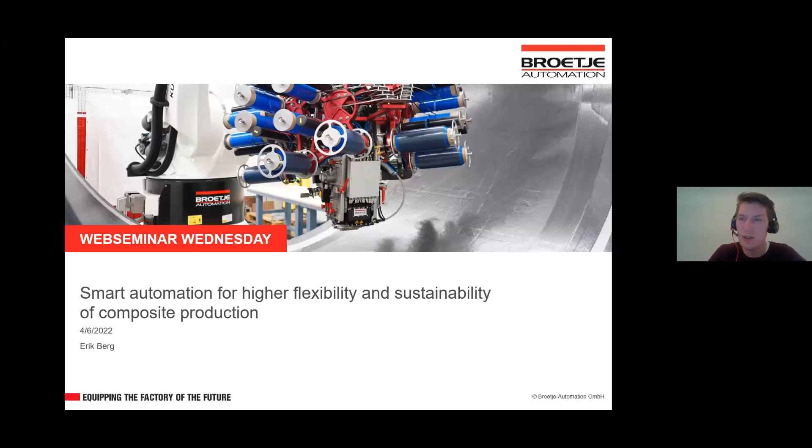Thank you for the introduction, Mr. Brenken. My name is Erik Berg. I'm working at Broetje Automation since 2015, and I would like to introduce you to this webinar about smart automation for higher flexibility and sustainability of composite production.

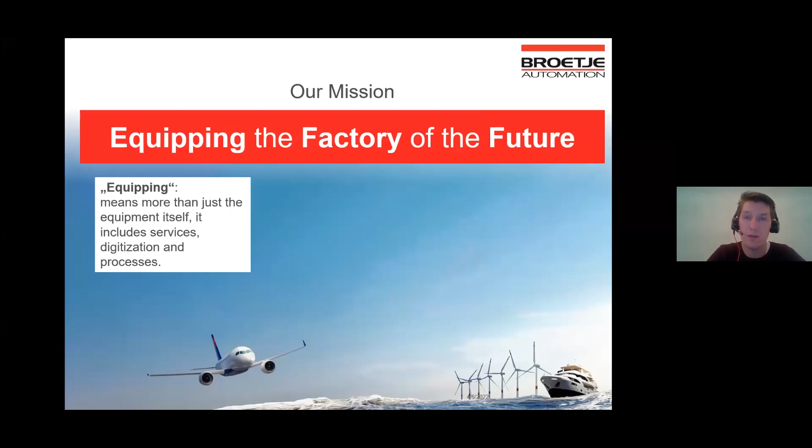First, I would like to briefly introduce Broetje Automation. Our mission is equipping the factory of the future. We are a company that is not only about equipment itself, but also about introducing services, requirements, planning, digitization and process development, which is required for factories being set up and changed. The factory itself is our core competence, where we equip with our automated machinery and all the equipment we deliver. 'Of the future' stands for the up-to-date technology we deliver, but also our know-how that goes into the newest products and processes we are constantly developing.

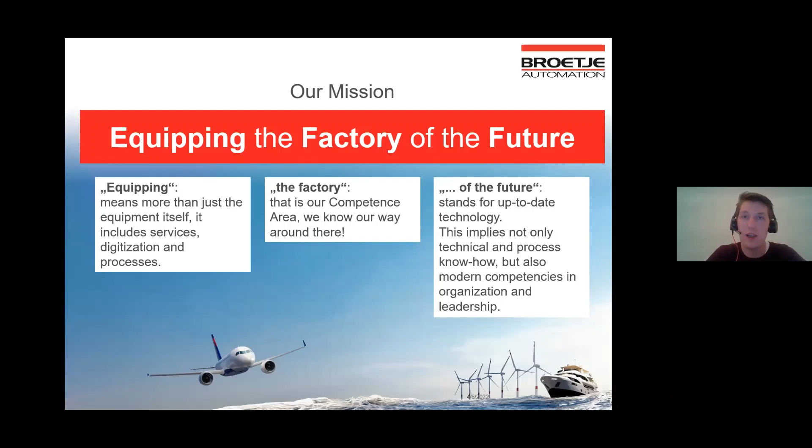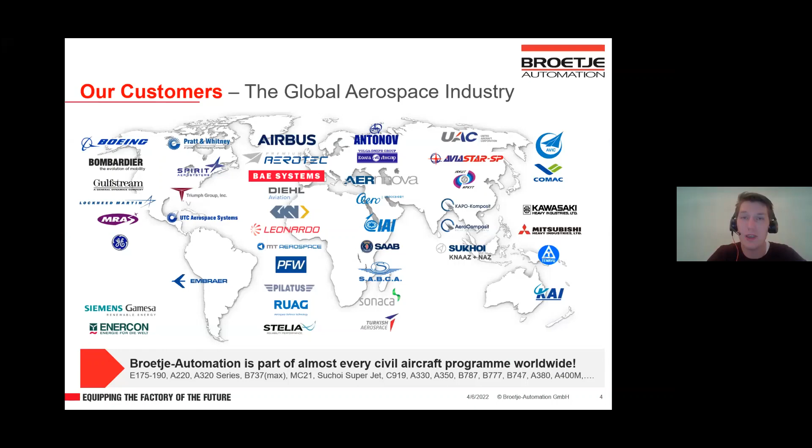Our customers are in the global aerospace industry. The big names, I guess, are Boeing and Airbus, besides all the medium and smaller aircraft manufacturers. Broetje Automation is basically part of most civil aircraft, so if you have been flying recently, probably you have been flying in a machine that was, in one part, assembled or produced on Broetje machinery.

We already have 40 years of experience, beginning in 1979 with our external activities in tool making. After relocating to Wiefelstede, we founded several subsidiaries over the years, like BA USA. We acquired companies like Hydro Control in Jaderberg, founded special service units, developed market-unique machinery, and relocated the US workshop to Chicago, where I currently am. I think the most relevant event was acquiring MAG Composites Germany, merged into BA Composites, Broetje Automation Composites, in 2013, and recently included into the main company Broetje Automation itself, which is now head of all composite development in Broetje.

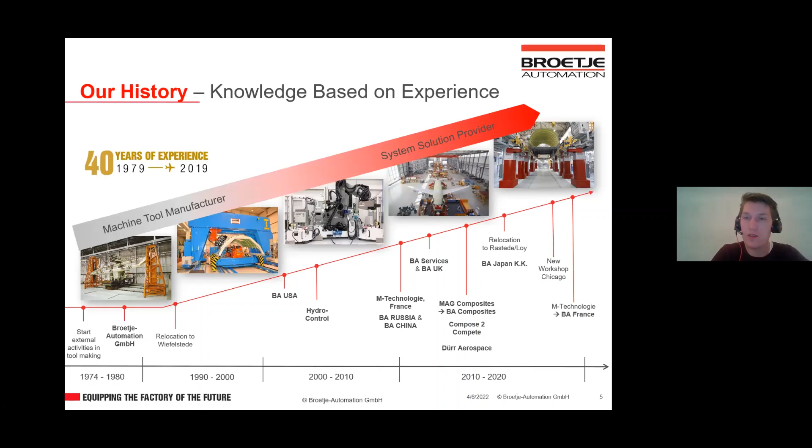We are on 3 continents, in 7 countries, with not only service departments but also engineering departments. Our main one is in Rastede - some of you maybe would like to come over, it's quite a nice and new shop floor we have there, from 2016. Then we have our US shop floor, which I'm currently at, the France subsidiary, UK Chester near the Broughton site, a site in Shanghai, China, and also Nagoya in Japan.

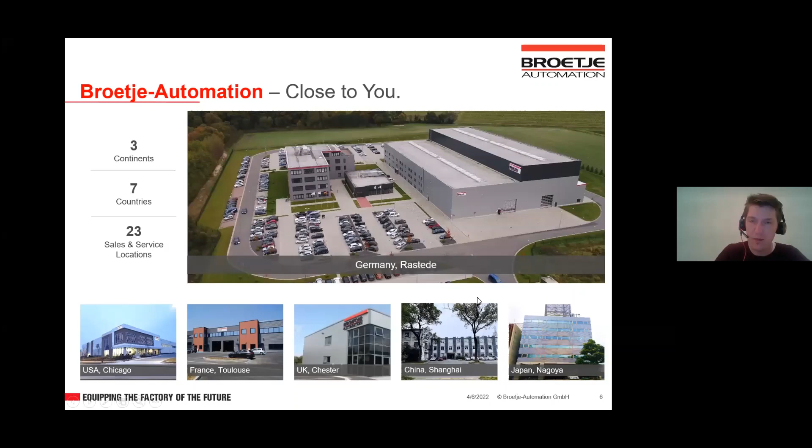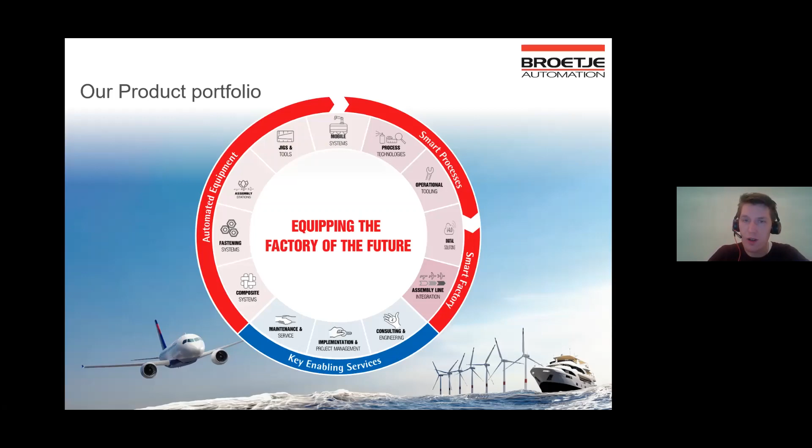Our product portfolio is not only automated equipment around composite fastening and assembly, we also operate in the smart processes area for highly sophisticated process technology and all the toolings required for operation. Also, with our subsidiary Compose 2 Compete, we do assembly line integrations and digitalization of all the services and solutions we have. This is the key enabling service for equipping the factory of the future.

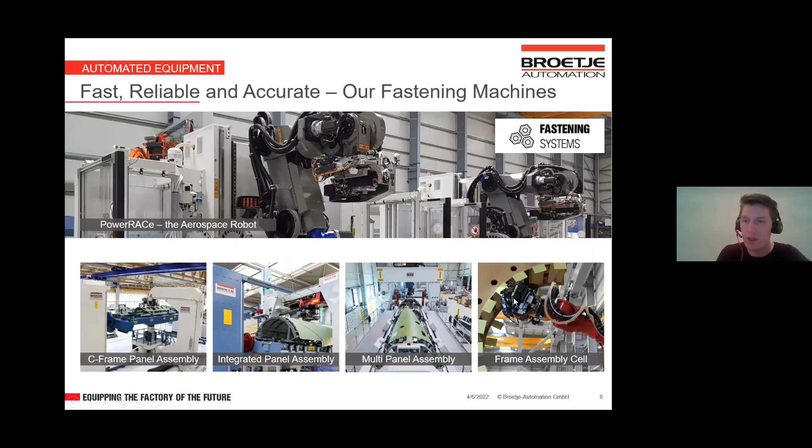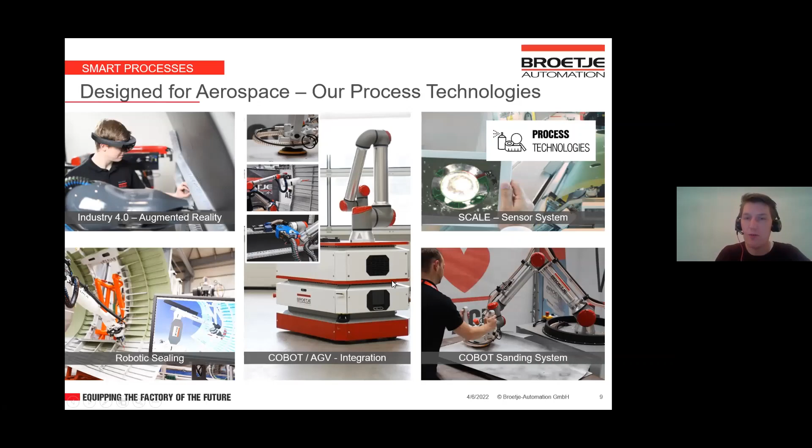We are mostly known for fastening machines, so a brief introduction with some pictures. For instance, our own development, PowerRACe, an aerospace robot designed for the requirements in aerospace, like high stiffness and positional accuracy, and all the different assembly cells for riveting and drilling required in aerospace. But we also do work around digitalization in processes, for instance augmented reality, which can be brought into manufacturing, is also part of our development. Besides that, AGVs, which we developed in recent years with high effort, bringing sanding systems with cobots up to market-available technology.

This is our brief overview about the composite systems. We have the industry-known composite systems like the fiber placement systems, which have been redesigned and newly developed within the last years. We also have our own market-unique composite preforming systems, which is market unique and going to be one key part for the next generation aircraft manufacturing.

We are also developing all processes around automated equipment to handle and move machine components or part components from station to station, like sorting and kitting. This is only one part of it, and all equipment required for a complete manufacturing system can be delivered by us.

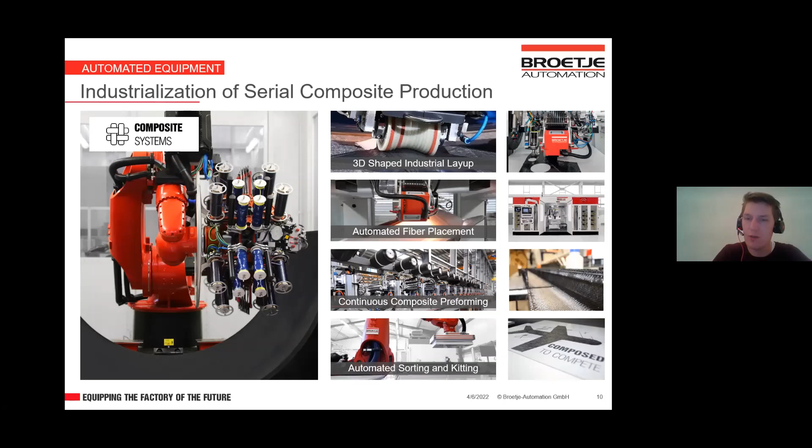I'll go briefly into some trends we see in recent years in the aerospace industry, coming from CFRP parts. CFRP parts are commonly done for bigger structures in pre-preg material. The pioneers A350 and 787 basically set those standards, which are currently also up to date. So we have a pre-preg based wing, a pre-preg based fuselage, for long-haul aircraft with higher passenger capacity, but rather smaller production rates.

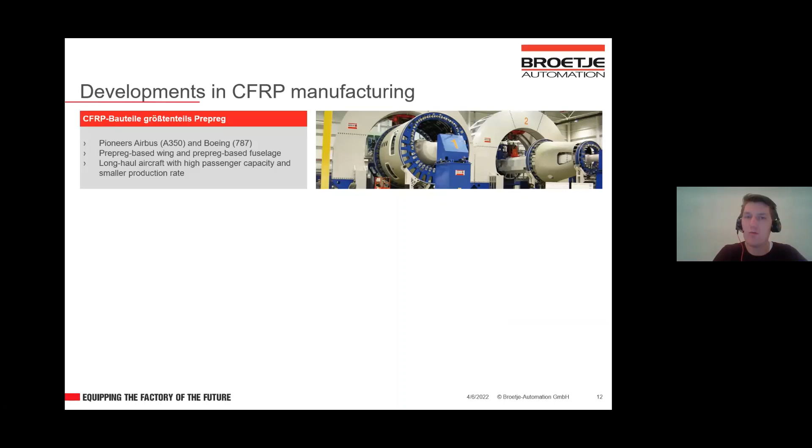More recent aircraft programs like the A220 or the MS-21 are smaller aircraft with still metallic fuselages, but CFRP wings. The wings are based more on dry fiber and infusion processes rather than on pre-preg, and they are seen for higher production rates and short to medium haul aircraft.

So we already see a slight shift, and for the next generation aircraft, what we see is the successors of the A320 and 737 might be going to CFRP wings, and the manufacturing process tends toward dry fiber and thermoplastics. The classical thermoset pre-preg processes will not be longer dominant, and we also hear everything wants to go out of autoclave.

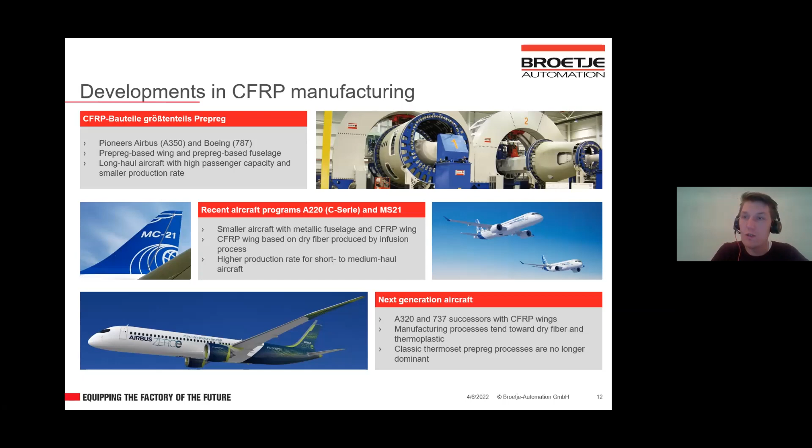So for the next generation aircraft, just a short wrap up: for skin manufacturing we see the possibility for dry fiber and thermoplastic AFP systems, which are required to be developed for future manufacturing processes, some already in place and some to be improved.

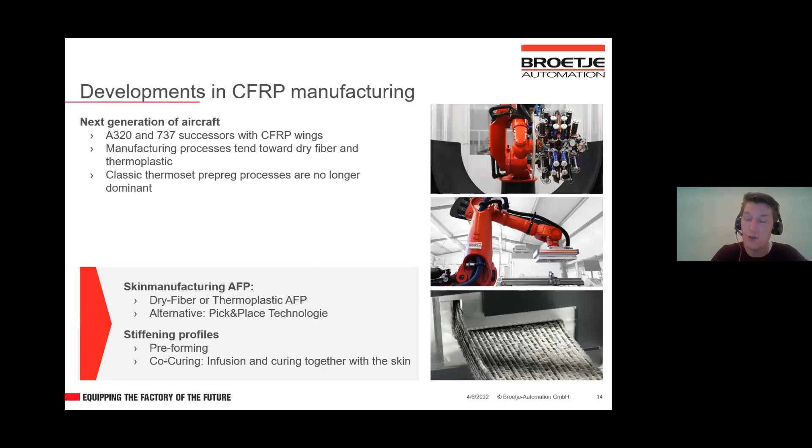Alternatively, we also develop pick and place technology as a subsidiary of AFP technology, because it might have some benefits on one or two points, especially for high rate production. And for stiffening profiles, we see going more and more to preforming of structures and then co-curing, so infusion and curing together of the stiffeners with the skin.

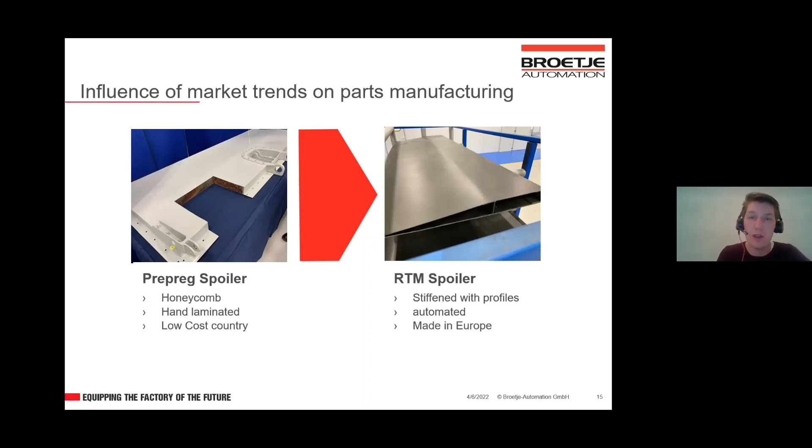These can also be seen in recent changes done by suppliers or aircraft manufacturers. Here on the left side, you see a spoiler for a wing, which has been made out of prepreg up to, I think, 2018. It's with a honeycomb inner structure, hand laminated in a low-cost country, and there's a change to improve this to, for instance, an RTM-based spoiler which has stiffening profiles inside rather than honeycomb, which is automatically produced and made in Europe. So these are already some changes which have been done recently.

I'll go into stiffening profiles, as I have divided my presentation a bit. Profile production is going to be, we see, based on dry fiber, because of the manufacturing philosophy of infusion and curing of skin and stiffeners in one step. So we are going into one-shot infusion technologies.

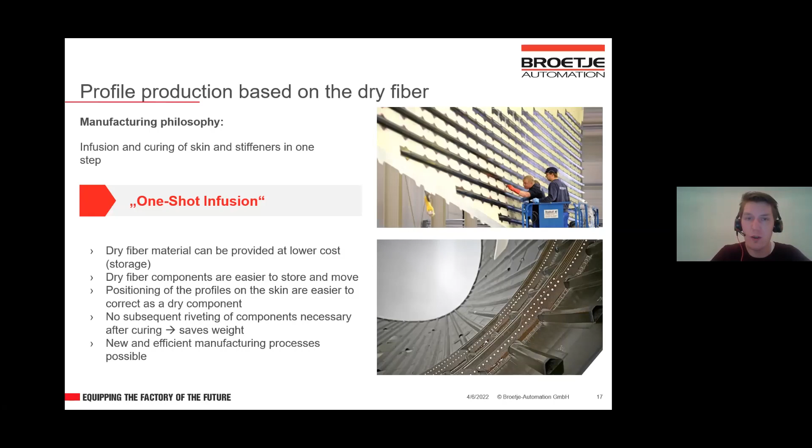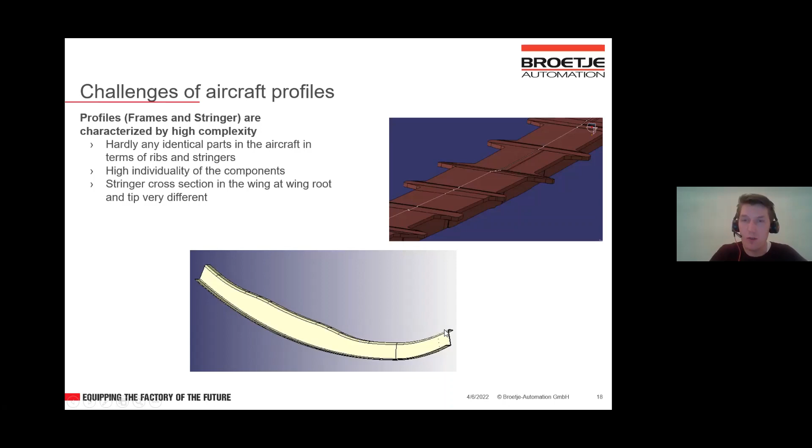And with this, we developed our own continuous preforming systems, and the system basically started being developed in 2007. So we already have 15 years of development in this technology.

It is a long way for development of these high effort machines, but it's starting to pay off for the new manufacturing systems, for the new manufacturing of newer aircraft. There's a reason for this, because we have all the process chains for preforming in one machine. This saves a lot of shop floor space and also saves a lot of handling of parts, which also saves the quality of the part.

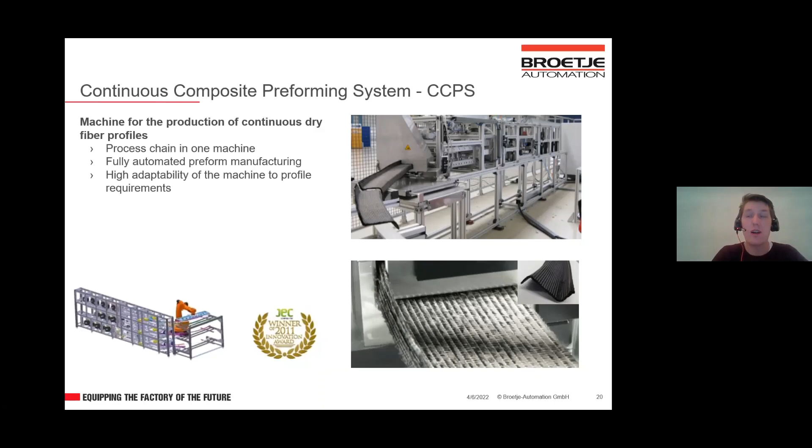We have it fully automated, so no manual interference is required to change the geometry of the profile or to do adaptations in cutting or something, and the machine is highly adaptable to the profile requirements. So with one machine currently, we can produce a high variety of profiles.

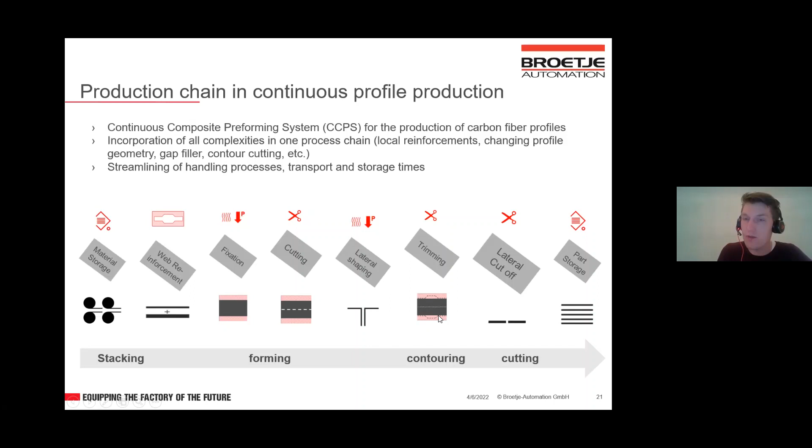The production chain in the production system is based on modules which are set up subsequently to induce the form. We always start with the material storage and setting up stacking, with also complex reinforcement plies that we can bring in. Then for dry fiber, we do a fixation also with thermoplastic binder. Then, for instance, if you go to a T-shape profile, we do cutting here. So we separate two lines, do a lateral shaping into two Ls with heat and pressure. And after final trimming, we cut off the part so we can store it.

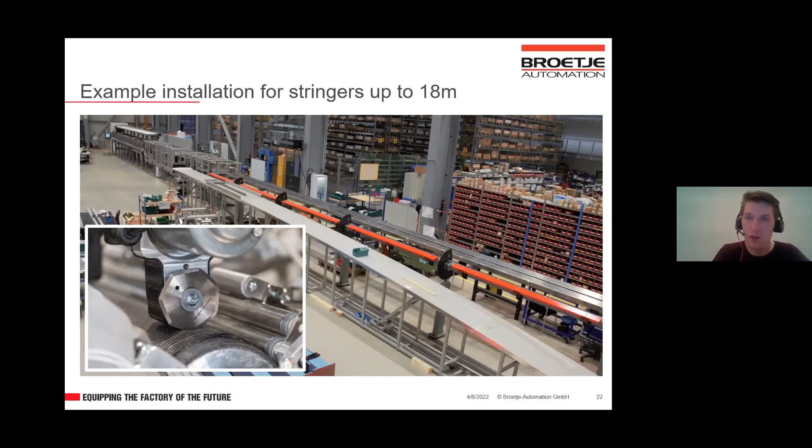So one system serves, I think, 21 or 22 stringer configurations in length from 18 meters to 1.7 meters. This is a very highly sophisticated machine. We can lay up 42 material layers, all independently. So each of the material layers can be shaped, can be cut to a certain length, and can be formed as required to the profile which is being produced.

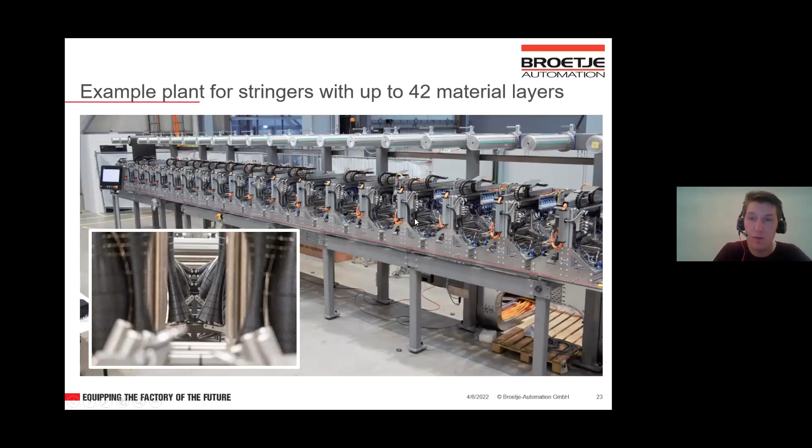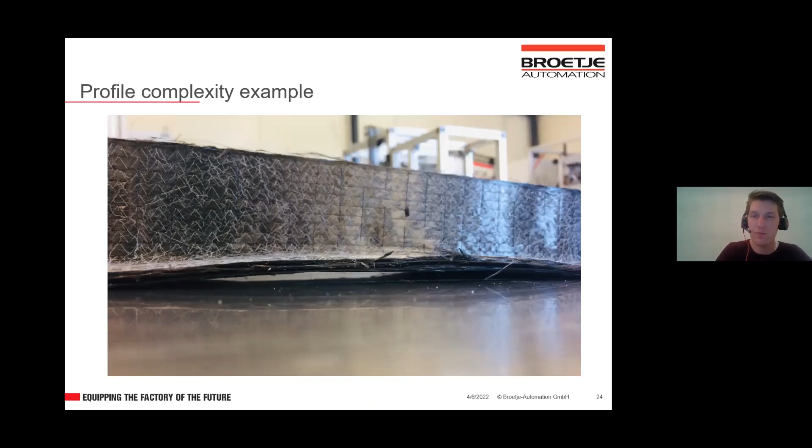Now I go briefly into the automation of skins and panels. Current challenges we have in skin production: for larger skin fields, we already have a higher degree of automation and technology which is driven by pre-preg. The most known technologies are tape laying machines and fiber placement machines. These are also characterized by high usage of supporting materials, so backing films, bagging films, releasing foils, and stuff.

And we see that there is a shift to dry fiber, not so much thermoplastic with large skin fields, but more so dry fiber with newer programs. On the other hand, smaller skin fields have more complex geometry, and automation was always a bit more difficult. So we had a lot of hand layup with cutting tables and a small degree of fiber placement technology supporting this. The technology is also driven by pre-preg, with high usage of supporting material again, but here too we see a shift to dry fiber or more thermoplastics with new aircraft programs.

And we see with the shift from pre-preg to dry fiber or thermoplastics, there are process adaptations for new processes required in the future.

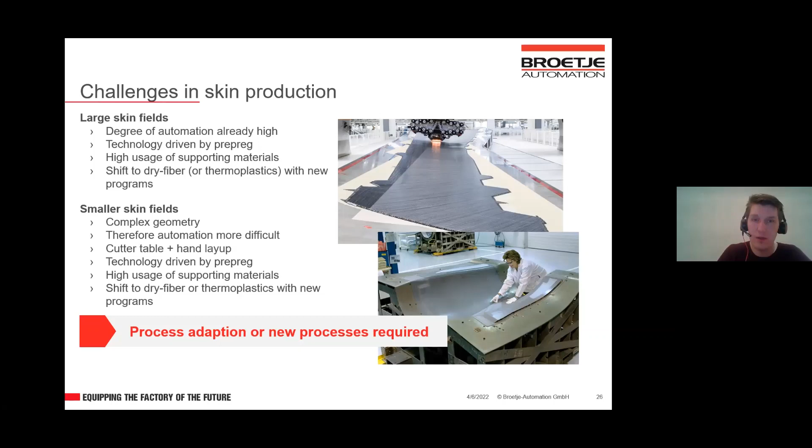This is why we improved our STAXX-AFP systems in recent years. We have basically four sub-machines in our portfolio. On one hand, the STAXX C1700. This is a fully enclosed 16-tow AFP machine, quarter or half inch tow width, with a layup area of 1.2 by 1.5 meters. The size of the machine itself is standard container size, so it can easily be trucked and shipped to any facility, being set up within a day and directly ready to produce parts for aircraft or other products.

This has been improved over the last years. I forgot to say, this is only for 2D applications, so you can only lay up flat. The 3D AFP machine can also lay up slightly contoured parts, which improves the capabilities of the machine by having some degree of 3D layup.

The more interesting ones developed within the last years are the STAXX FLEX used for thermoset material, but also now, very recently, we are setting up one for thermoplastics, which we are currently setting up on our shop floor. This is a full 3D layup robotic AFP end effector with 16 tows, quarter or half inch. We have the material spools all on one head, so we have the capability of automated AFP head change, still also with thermoplastic pre-preg fiber placement, which is, I guess, a market-unique feature: thermoplastic layup on a fiber placement head.

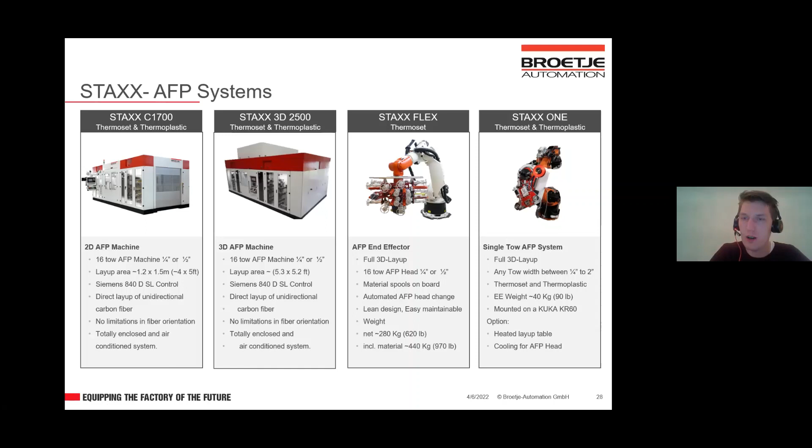This can be equipped with all kinds of required equipment like layup tables or cooling. It all depends on the machine. Previously, the machine was more set up for R&D purposes, but we see this machine shifting more and more to manufacturing of real aircraft or aircraft parts, or even different parts like pipes.

So just a brief introduction to the AFP head itself. We have a very compact design for high performance with 1.4 meter end effector diameter, which is very narrow for a head with spools on board.

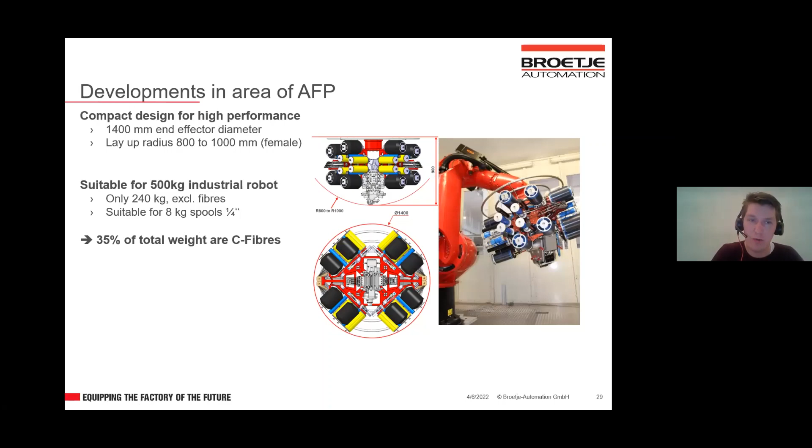So we can have a layup radius of 800 to 1000 millimeters in female. As I mentioned, it's suitable for a 500 kilogram industrial robot like we have here, because with 8 kilogram material spools times 16, we have 35% of the total weight being carbon fiber.

This is a recent machine we are commissioning, a thermoplastic AFP head on the STAXX-AFP, which has a laser diode heating source with a wavelength of 980 nanometers and a power of 6.4 kilowatts.

This has some pros, but also the con that you don't have the ability to quickly exchange, and also this fiber cable is very prone to damage because of the minimum bending, maximum bending radius.

The process control here is all done via the CAM system and the layup program itself. We have some ability to control temperature and speed profile in the machine, but basically the CAM system controls what we are doing with this machine.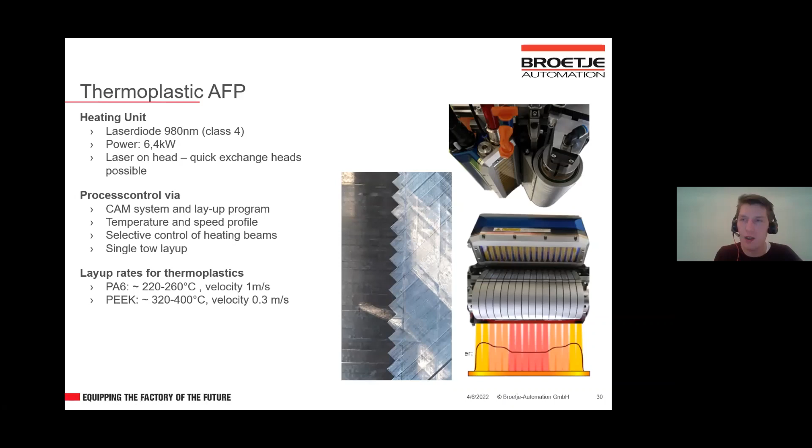Of PEEK. The layup rates for thermoplastic we can achieve for PA6 is around 1 meter per second. For PEEK, we currently have a velocity of 0.3 meters per second, which is currently being improved, but this is our state of the art currently.

Then also one very interesting development from my point of view, thinking about sustainability, is with the Staxx One, the single tow fiber placement system, the layup of recycled carbon fibers. This is done especially in a common project with Fraunhofer, Lamilux, Covestro, and others in a project called ScrapSero.

We lay up recycled carbon fibers which are aligned within the tow. The chopped fibers are aligned within the tow, and we have two different materials: one thermoplastic matrix material and dry fiber material.

The material is laid up with 2-inch wide tows, and the recycled carbon fiber, as everyone can imagine being familiar with tows, has a very low tolerance to tow tension. You can easily rip the tows apart by hand into two pieces. This is a high requirement for AFP machines because they always work with tow tension to keep the positioning of starts and ends of the layup.

The Staxx One is used, as I said, with 2-inch wide material spools. We are laying up 4 plies for testing all directions, and we use the Heraeus flash lamp as a heating source because we see this as a very good and sophisticated heating source, especially for dry fiber, but also for low temperature thermoplastic materials.

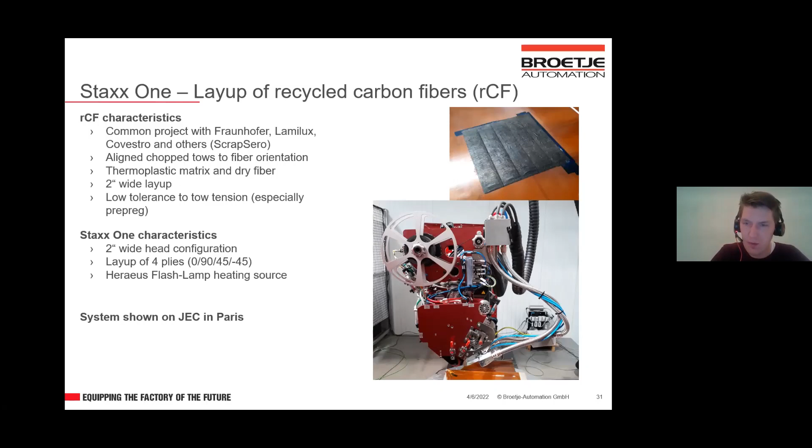And this system will be shown at the JEC Fair in Paris starting, I think, the 4th or 5th of May. Everyone is welcome to visit us there.

What we currently also do is integrate quality assurance systems into fiber placement machines, where we have camera systems which are monitoring during the layup, not only a picture, but also the complete surface topology of the part.

So if a tow is missing, if a gap is growing too big, if the edges of the tow or the layup are misaligned, we see this already within the quality assurance system, because this improves the availability of the machine on the manufacturing floor.

Usually the monitoring is done by operators, and the operator needs to figure out after each ply where the defects are, and this system already shows the defects and points the operator to the positions of the defects to be checked and, if required, reworked.

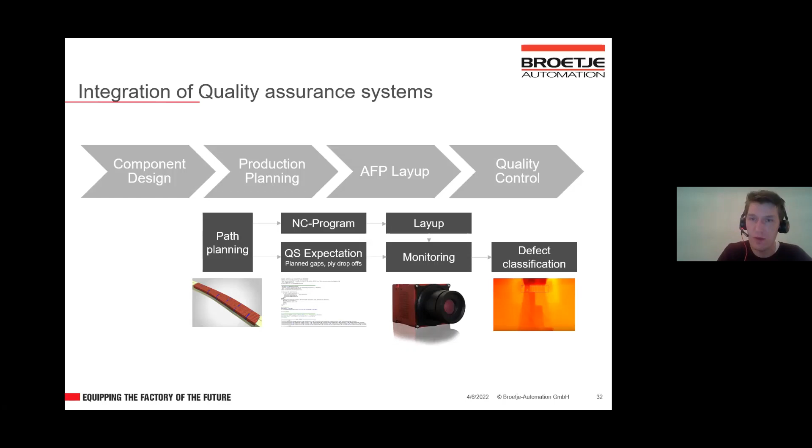Regarding composite integration, we also develop alternatives to AFP systems, and we see some potential upsides. We have developed composite handling systems in recent years where we utilize pneumatic muscles as actuators with material-protective suction cups, achieving a very high positioning accuracy. I'll show some pictures, but I think the most interesting part is layup rates.

Having layup rates higher than 100 kilogram per hour is very interesting for high rate production of wings or fuselage skins. We can directly create the laminates in the infusion mold, reducing the requirements of maneuvering and handling the part, especially dry fiber, which is what we usually have here and what the machine is designed for, since dry fiber is very prone to damage from handling or machine handling.

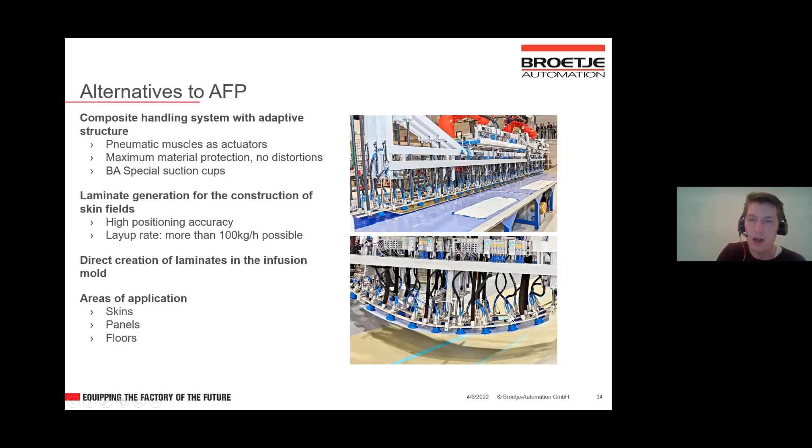The areas of application are for sure flatter parts like skins, panels, and floors. We can also do curvatures on the side, but not as extreme as you can achieve with fiber placement, I guess.

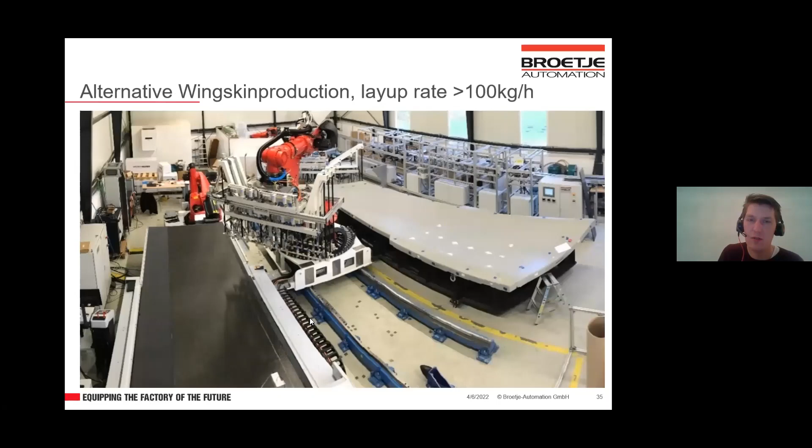You can see a cell we set up with a customer for wing skin production with a layup rate above 100 kilogram per hour, with a cutting table on the left side automatically feeding the positions of the plies being cut to the system, and the system automatically positions them onto the wing skin.

We can achieve very high layup accuracies, like you see here. We also have very sharp laying edges, which is not impossible but very hard to achieve with hand layup, because you don't have any fraying on the edges here, and the accuracy is very, very high.

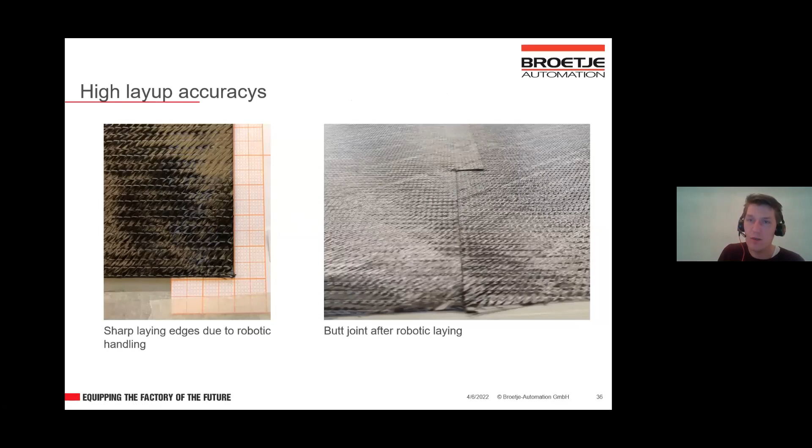You can see here a butt joint after robotic layup. It goes from a butt joint here, and then an overlap here. A very good, highly sophisticated system we have developed in recent years.

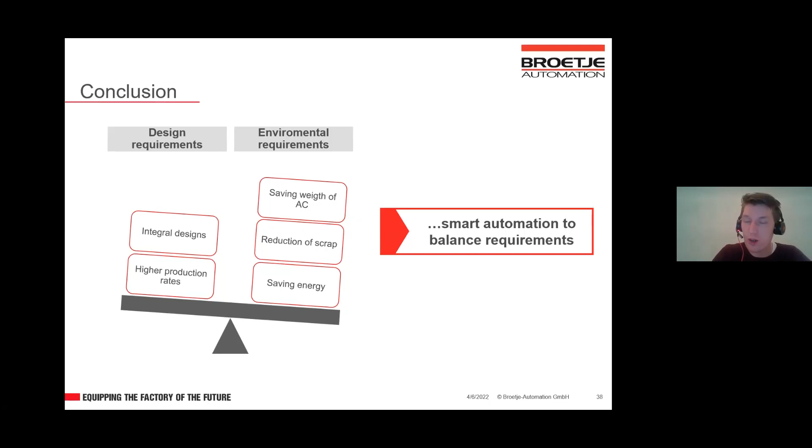To come to a short conclusion of this presentation: we see there are shifting requirements, not only by design for integral designs and higher production rates, but also environmental requirements coming into future aircraft programs, like saving weight, reducing scrap, and saving energy. So we see that more smart automation is required to balance these requirements.

This leads to new manufacturing methods we would like to introduce, which are also required to increase productivity per square meter, for instance to reduce the shop floor area, and so reduce the energy consumed for heating and land grabbing, and also reduce interfaces between machines, which improves the quality of the parts themselves.

We also see a shift to manufacturing methods for integral structures. That means we assemble the components before infusion, like with the CCPS technology, composite preforming system, which produces the stiffeners that can then be laid up directly on dry fiber skins, which may be produced by fiber placement, dry fiber placement, or pick and place technology. The replacement of prepreg reduces scrap and supporting materials by a huge extent.

We also need to increase machine productivity for production methods for large series, to increase the productivity of the machine itself and its availability, like we do with the QS system, where the machine is more able to do what it wants or should do, like laying up, instead of waiting for the operator to check defects.

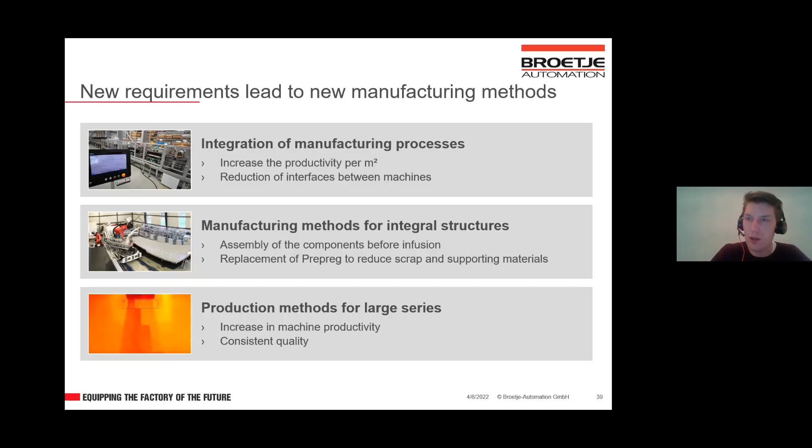This is also a necessity for the future, to have consistent quality, so you have less scrap, less waste, and fewer parts which need to be reworked after production.

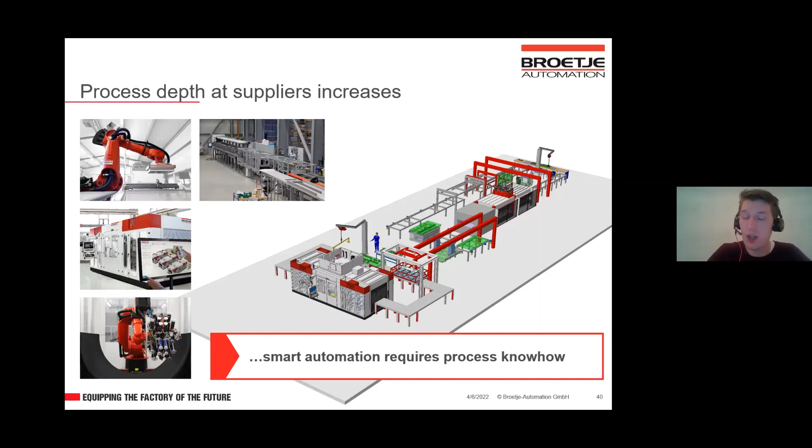We see that the integration of processes requires the process depth on the supplier side to increase, and we as a manufacturer of machinery need more and more process know-how to be able to improve automation, to move into smart automation, and not only substitute existing processes with a machine, but have an overview of all the processes being done within the manufacturing system and the manufacturing line.